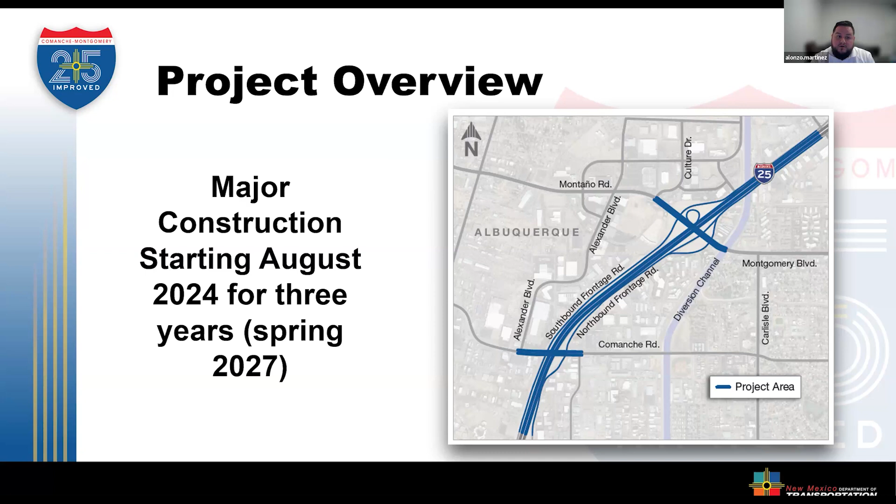So where are we today? We're on the brink of starting major construction. Should be starting here this August — it's August 2024, we're here now. We are expecting construction to last about 3 years in this area. But don't be alarmed — the way we structured it in the RFP, construction is going to be done in isolated areas. Obviously one of the biggest goals for the project is to keep access, keep mobility. It's one of the priorities for the department and for this project.

We can go to the next slide. So we're going to touch on various things. I think we're going to talk about the improvements here, right? What are some of the things y'all be seeing with the final product?

So we'll start with the main line. Main line will be widened to 4 lanes in each direction, northbound and southbound. Additional to the 4 lanes, we will have auxiliary lanes — these are the starts of the on ramps, the off ramps, etc. So in some areas it'll be wider than the 4-lane section.

In this project, we're going to be reconstructing 2 interchanges: starting on the south side, the Comanche interchange, and on the north side, the Montgomery interchange. Both interchanges are going to have very similar final features: reconstructed bridge, advanced U-turns — if you're familiar with El Paso or Texas, sometimes called Texas turnarounds. And then underneath the bridges, we'll have the bike separated shared use path with a concrete wall barrier in those sections.

Just wanted to talk about each interchange. Comanche — so on Comanche, we, as Horrocks, worked with NMDOT and City of Albuquerque to prepare the RFP.

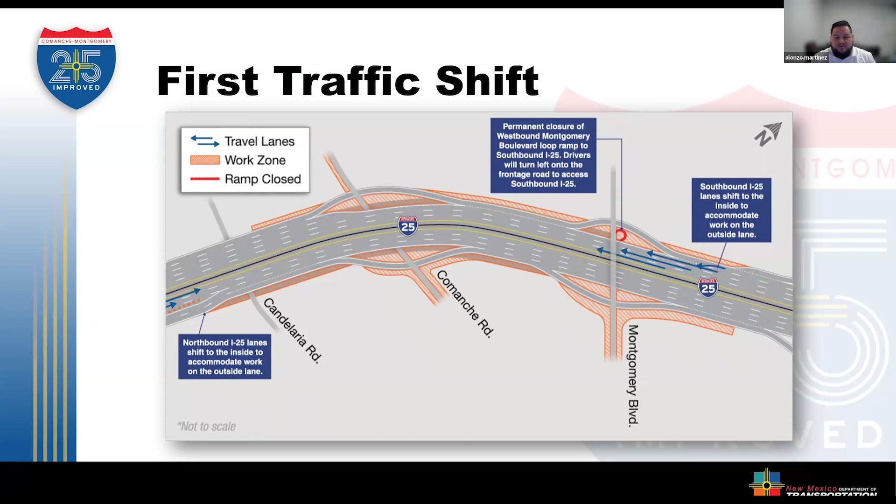There is going to be some additional lane closures during the non-working hours, what we call off-peak hours, so there will be some additional delays. I know there are some folks here with churches worried about that - we can talk about that at the end. There should be some expectations of further closures over the weekend as girder placements and big construction items happen where that closure is necessary. The RFP has a limit on those, so it's not a free-for-all - the contractor isn't allowed to close the project at all times. It's something very thought out, and it's a balancing act - a bigger construction zone could mean a faster project, but more impact. So it's all a balance of these things for the project.

So honing in here on the loop ramp - the loop ramp will be closed. We will be providing a double left turn there; I believe currently there is only a single left turn bay. So we're going to be diverting all that traffic, shutting off the shoulder on the mainline I-25, which will be impactful. We definitely want the public to be aware of this closure. This closure is necessary to start building those bridge abutments outside the travel lanes, as they start gearing up for the bridge constructions.

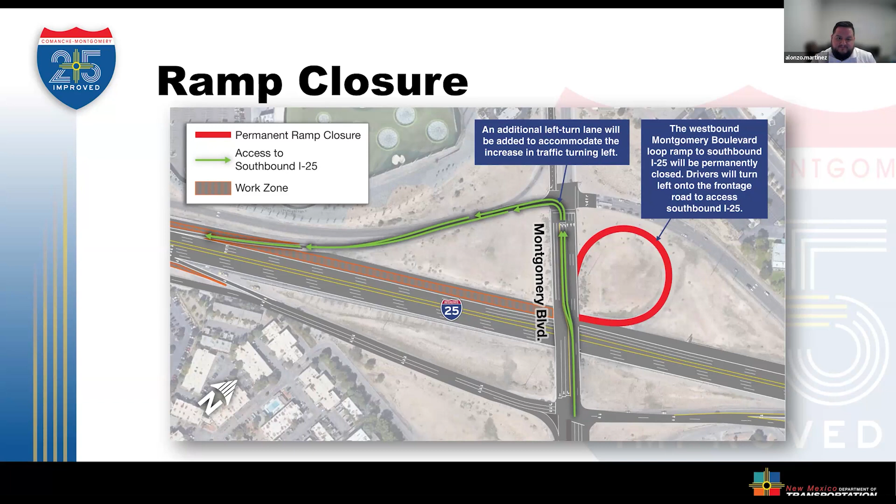For our drivers, anticipate lane reductions on I-25 and local streets throughout construction as well. Most of those lane closures are going to be off-peak - we're trying to prioritize mobility and access, and want to be as least impactful as we possibly can. The contractor has a schedule right now to be working 24/7, so you're going to see a lot of activity - that should expedite the construction time and limit impacts to the drivers.

Businesses and residents, think like a lot of folks mentioned on the call, there's apartments, housing, businesses right up to this project, literally in your backyard. We are prioritizing driveway access to all establishments along the project. In that phase 1 traffic control that was approved, there are a lot of business access signs to promote business access.

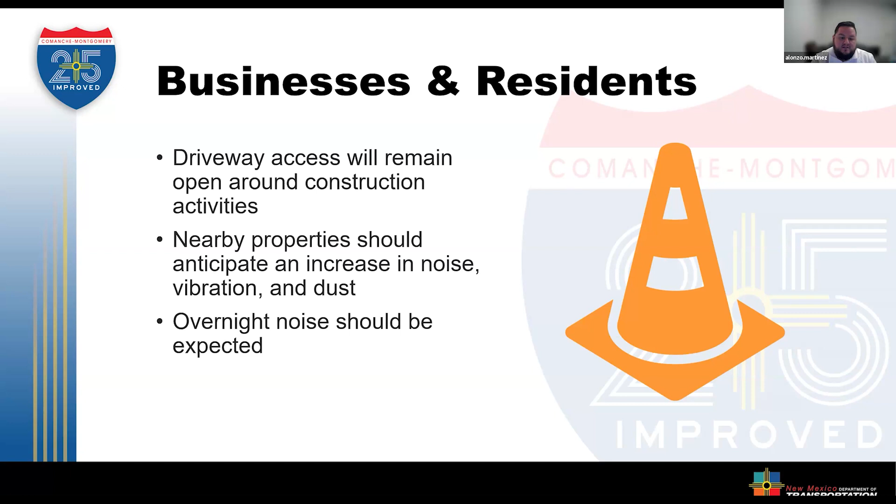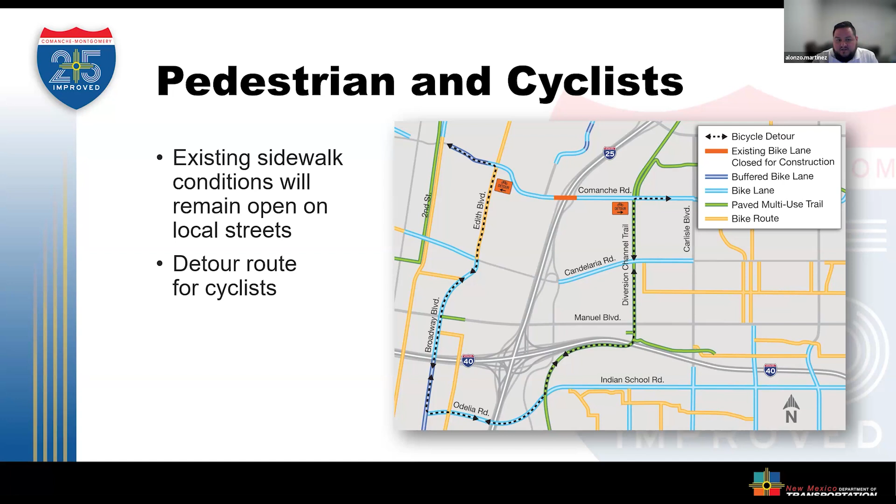You can also sign up for email and text alerts on our website. It's going to be the first thing that pops up. This is really important, so I highly encourage you to do it as soon as possible.

Our email blasts are going to occur at milestones throughout the project for the next 3 years, and our text message blasts are going to be a lot more frequent. They're going to tell you when there are planned and unplanned impacts in the construction zone. So when we are reducing or closing lanes, you're going to get that immediate text message. You'll also get a text message when this is resolved, and when there's an incident in the work zone, we're also going to notify you.

This is just to help you navigate your way through the city. Really, we want you to avoid the area when there are incidents that occur or major impacts that are occurring, and plan ahead of time. So again, I highly encourage you to go sign up for those.

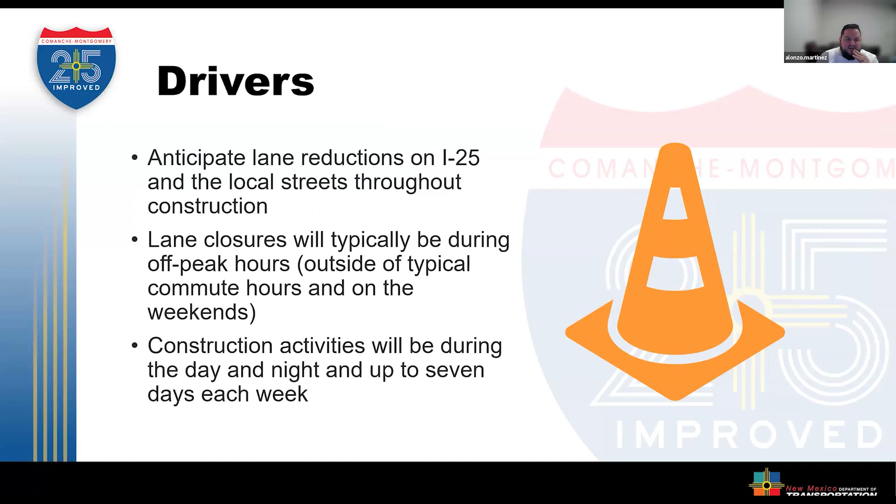Before we do that, I just want to talk about the grand scheme of phasing, if I may. So that phasing — we're going to start on the main line, pushing traffic towards the median, working on the outside. First phase, we're only allowing the contractor to work on the main line and Comanche, so it's a strict restriction. You won't see work per se on Comanche and Montgomery at the same time — that work will essentially flip-flop. So if the contractor is working on Montgomery, they can't work on Comanche, and vice versa.

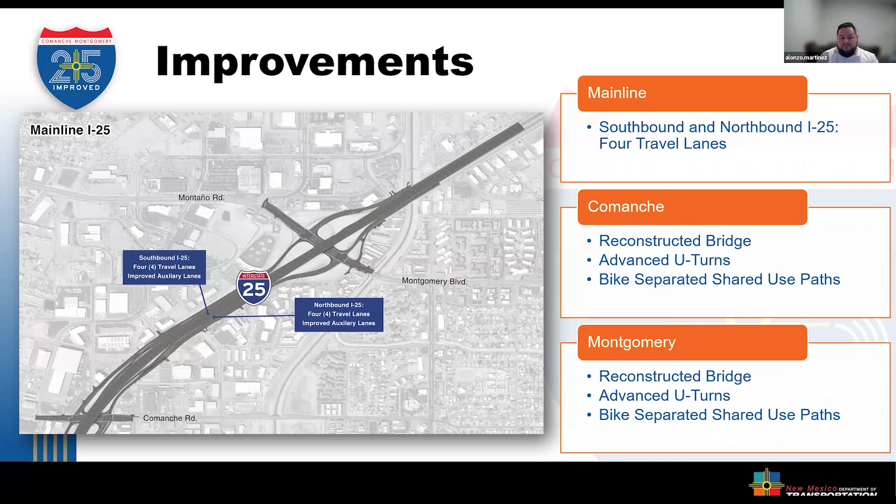The scheme of the construction phasing will be building Comanche first, and once that's completed, they'll move to Montgomery. Another aspect is that we added into the RFP that the contractor can't work on the frontage roads as they're working on the main line. So once again, we're not allowing the contractor to just have major impact to the traveling public. There were items like that put in place with mobility and access in mind.

So yeah, I realize I forgot to touch on that, but I think it's important. Just know when construction happens, you will see barrels the whole stretch, but the main work will be in isolated areas for that purpose.

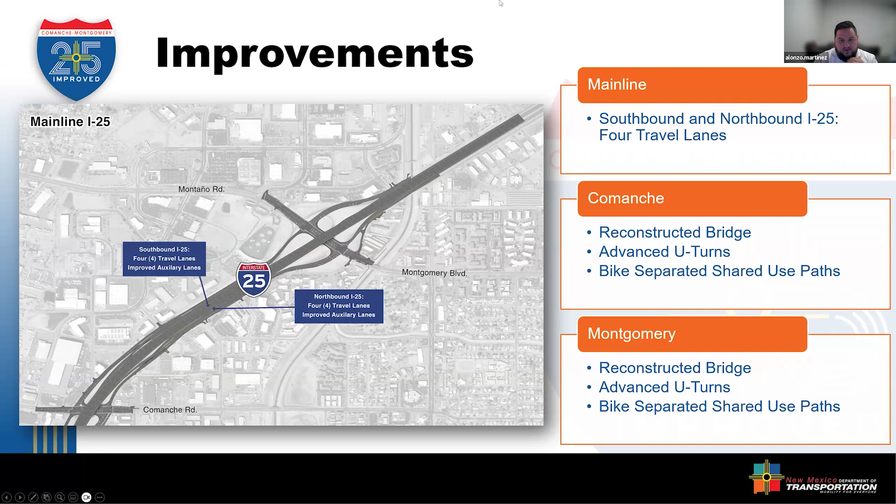Thank you, that's helpful. Okay, so we're going to take questions — Ben and then Kent.

Sure. Yeah, I wanted to say, first of all, most aspects of this project look pretty amazing. I can't imagine a design like this even 10 years ago. But I did see some issues with the bike access.

The middle of the scope of the project looks good because there's the fully protected multi-user pathways on the overpasses and the underpass. But leading up to that, I think it's Comanche that has a separated bike path all the way through the western scope of the project, but not on the east side. And then Montgomery doesn't have a bike path on either side.

I think that's right. So I was wondering why we can't have a protected, off-street bike path through the whole project, like just make the sidewalks through the whole project a multi-user pathway instead of putting bike lanes between the through traffic and the right turn lane, because that's just going to create conflicts.

And I noticed in the bike plan these two interchanges are high priority, and you've got the north diversion channel just to the east. So I really feel like we need to tweak this design a little bit so that we're setting up this project to be accessible for everybody, no matter how they want to travel through these intersections, because we're going to be stuck with this probably for 30 or 40 years. So we need to get it right, and we need to have the things in place.